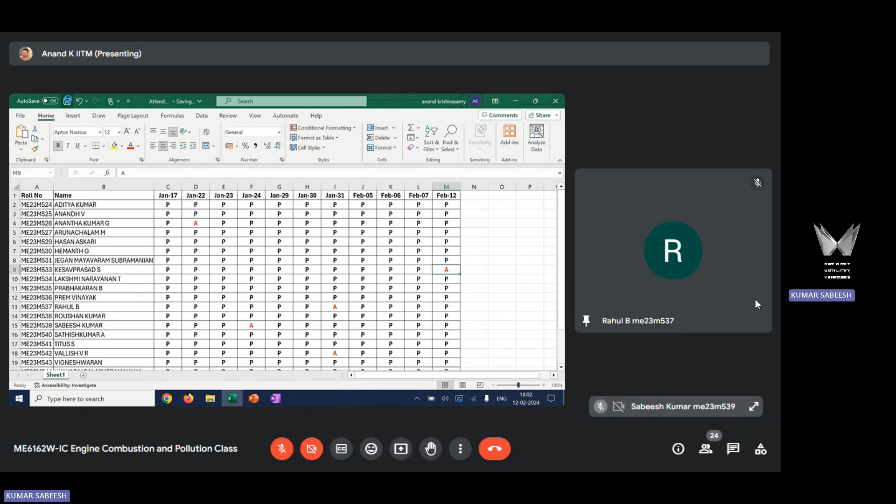Based on your request, I have discussed with the coordinator and given you the schedule for the exam and mode of conduct of exam for ME6162W. As informed, Quiz 1 and 2 will be conducted in IITM for the students here in Chennai. For outstation students, I think 3 of you, the exam will be conducted at TCS Center. The details about the mode of conduct and venue will be informed to you before the exam.

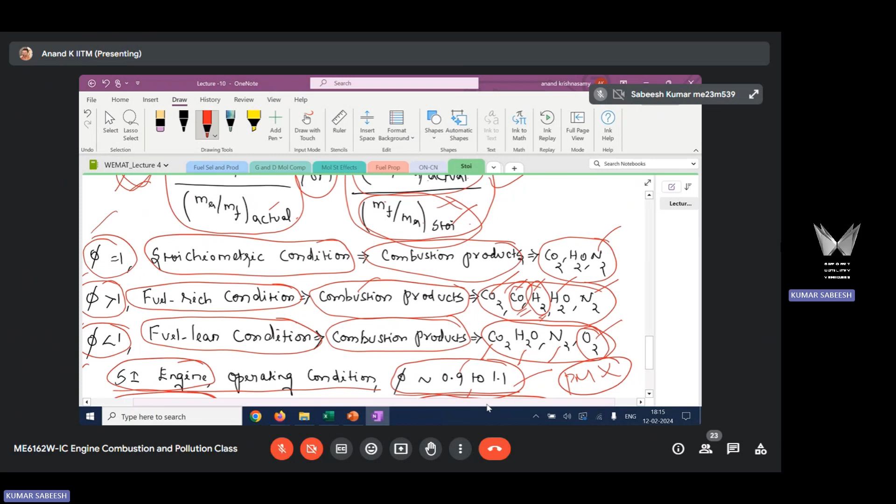If it is a fuel rich condition, the products are going to be different. You are going to have CO and H2 apart from what we have discussed. CO and H2 are the major products of incomplete combustion. Since you are using more fuel than the theoretically correct proportion, there is a deficiency of oxygen, which leads to incomplete combustion.

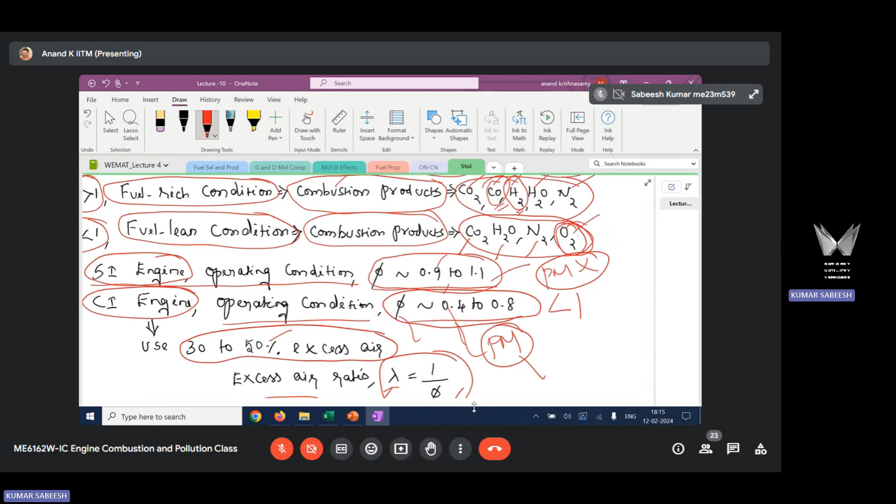The third condition is phi less than 1. When phi is less than 1, the fuel you use is less than the theoretically correct fuel proportion. This means you have a lean condition, fuel lean condition, meaning there is more oxygen available in the combustion system. Because of that, you will have that excess oxygen appearing in the product. So these are the possible phi values, and accordingly the major product composition is going to be different.

We also discussed that SI engine will have a phi range of 0.9 to 1.1, very close to stoichiometry. This is for two reasons. One, SI engine is flame propagation based combustion. To maintain a stable flame, you have to run your engine around stoichiometric condition. That is what gives a stable flame.

When the flame is not stable, the combustion is not stable, then you will have a problem of poor combustion stability and associated problems in SI engine. We want to avoid that, so we are running SI engine close to stoichiometric condition because of this reason.

The second major reason why we run SI engine under this condition is that three-way catalytic converter efficiency is high. The three-way catalytic converter is one of the after-treatment control systems predominantly used in SI engine, without which you cannot meet the current emission norms. I will discuss more about this after-treatment control system in the second module. This converter efficiency will be high only close to stoichiometric conditions. These are the reasons why we run SI engine under this condition.

CI engine, if you look at it, is always less than 1 as shown here, 0.4 to 0.8 operating range—it's always lean. This is the overall fuel air mixture, and you should note that SI engines are subject to homogeneous mixture combustion. The phi range of 0.9 to 1.1 will be the actual phi value inside the engine, whereas in CI engine, it is subjected to heterogeneous air fuel mixture.

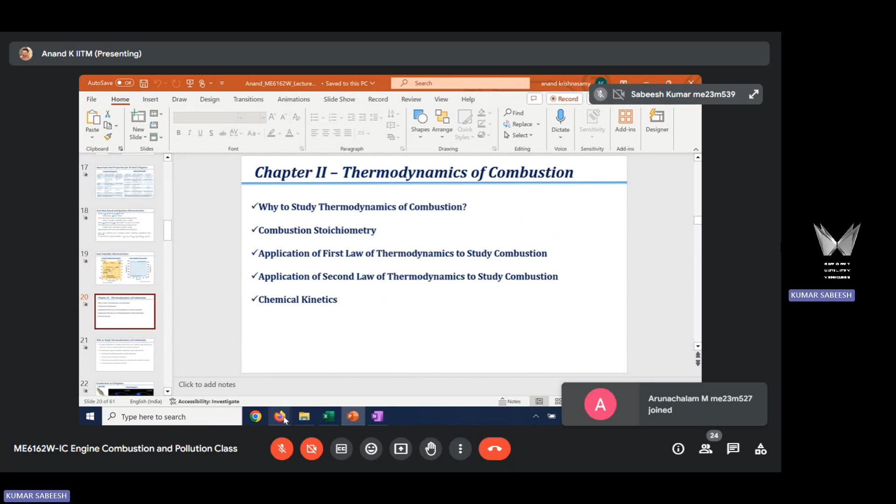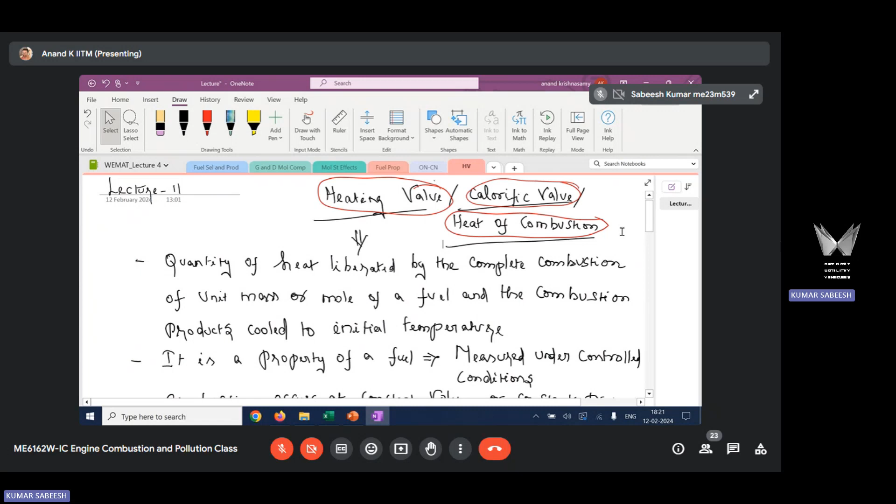Now let us see how to get these two parameters. This heating value is also referred to as calorific value in some textbooks, and also referred to as heat of combustion. All these carry similar meaning: heating value, calorific value, or heat of combustion. Different textbooks follow different nomenclature. I will follow 'heating value'.

What is this heating value? It's the quantity of thermal energy released, or quantity of heat liberated, by complete combustion of unit mass or unit mole of a fuel, where the products of combustion are cooled to initial temperature. So this gives you an estimate of how much thermal energy is released if you burn a unit mass or unit mole of a fuel. That is given by this heating value.

So here you could see that we are imposing two conditions. Condition number one: the combustion event is complete. Second one: we are cooling the combustion product to initial temperature. These two conditions are imposed when we define what this heating value is. Why do we impose these conditions?

These conditions are imposed because heating value is a property of a fuel. Any property should be measured under reproducible conditions, so you should get a similar value when you measure it multiple times. It's a measurable property of a fuel, that's why we impose this condition. Any property is measured under controlled conditions because it should be reproducible. So whoever measures it has to comply with these conditions, and under those conditions the heating value should be defined. That is the purpose here.

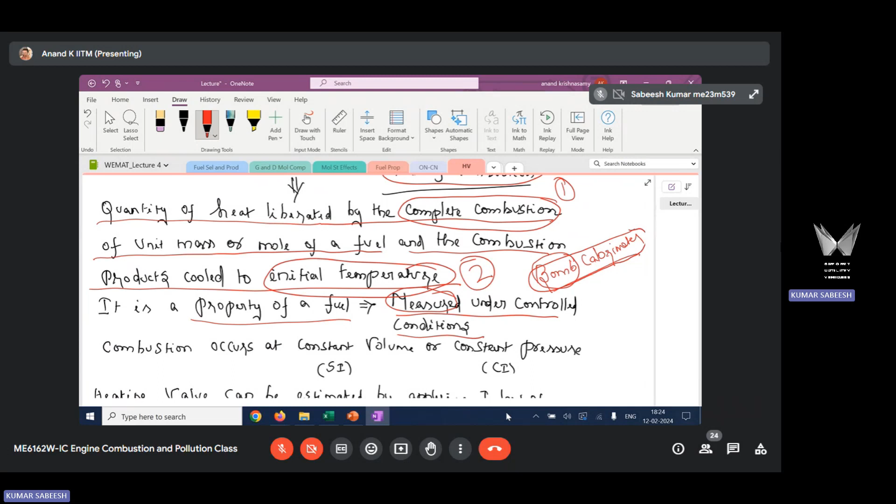Now let us see how we can estimate it by applying the first law. There are two conditions: combustion can happen at constant volume, which is how we model SI engine combustion with constant volume heat addition. The other option is combustion at constant pressure, which is how we model heat addition in a CI engine based on thermodynamic analysis. So SI combustion is approximated as constant volume and CI engine combustion is approximated as constant pressure combustion.

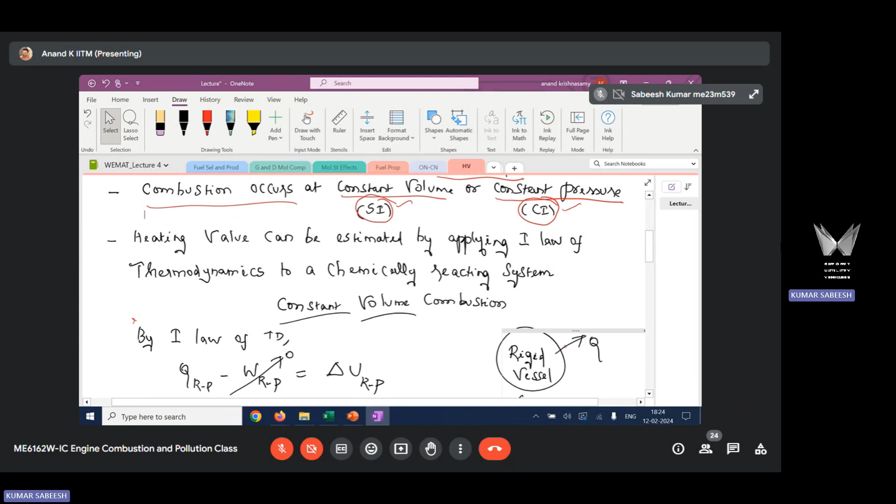Now let us see how we can get an estimate of heating value by applying first law under these two conditions. We are calculating heating value by applying first law of thermodynamics to a chemically reacting system. A system is a fixed mass of matter. A chemically reacting system has a fixed mass of fuel and air before combustion, and after combustion it will have a fixed mass of products of combustion. Now let us consider constant volume combustion, case 1.

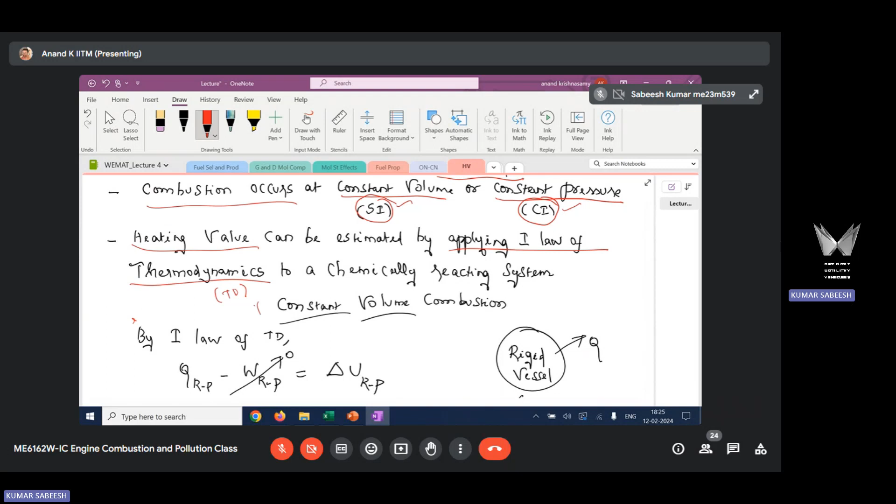Constant volume combustion you can visualize as a combustion event happening in a rigid vessel. In a rigid vessel, the volume is always going to be the same, and this fuel and air taken into the rigid vessel combust and release thermal energy. We are going to get an estimate of this thermal energy under this condition, which is constant volume combustion condition.

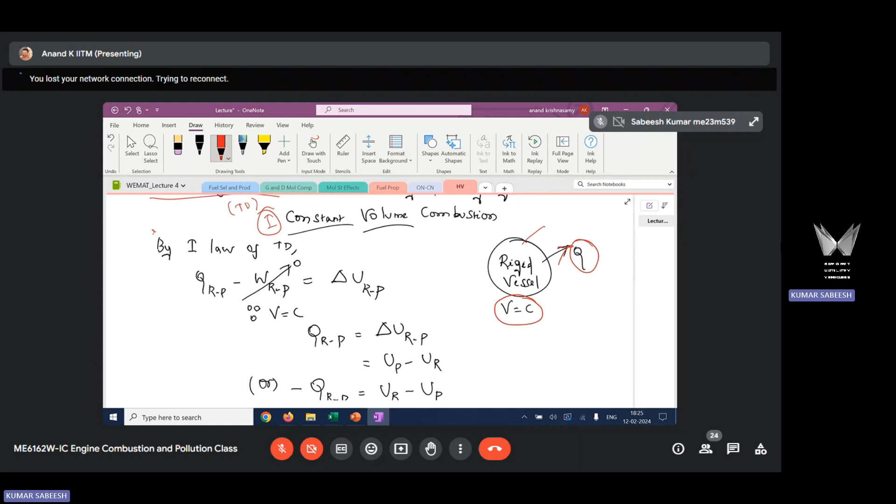So when you apply first law of thermodynamics to a system, the general form of the first law equation is Q minus W equals delta U. First law is actually a form of law of conservation of energy. We are just doing an energy balance here. Q is thermal energy and W is another form of energy.

Here I have considered a chemically reacting system. What does this R in the subscript stand for? R stands for reactants and P stands for products. Q minus W with a subscript R to P means reactants are converted to products. That is what the subscript is representing. So Q R to P minus W R to P is equal to delta U R to P by first law of thermodynamics.

Since we have considered constant volume combustion, volume is constant, so there is no displacement work here. W becomes 0. W is nothing but the integral P dV, displacement work, where dV is change in volume. In our case, in a rigid vessel, volume is constant, there is no change in volume, so W becomes 0. So Q minus W equals delta U R to P, and since W is 0, Q will equal delta U R to P.

You can write this as U P minus U R. So negative of Q R to P is U R minus U P. And what is this Q R to P? This is called heat of reaction.

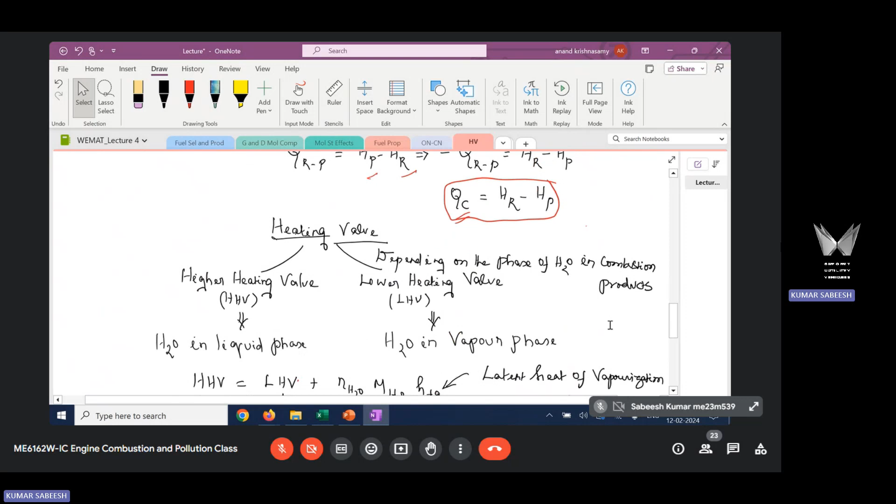Now, when you talk about heating value, there are two heating values that come into picture: higher heating value and lower heating value. This higher or lower value is based on the phase of H2O in the combustion product, whether it is liquid phase or vapor phase.

Liquid or vapor phase. So when a fuel combusts with the air, what will be the phase of H2O? Will it be liquid phase or vapor phase in the product? Vapor phase, sir, it will be in vapor phase. As a resultant of combustion, H2O will appear in the vapor phase in the product.

As such, it remains in the vapor phase. Suppose, as per the conditions we impose, if you are cooling the combustion product to the initial temperature, what will happen to that vapor? It will become a liquid.

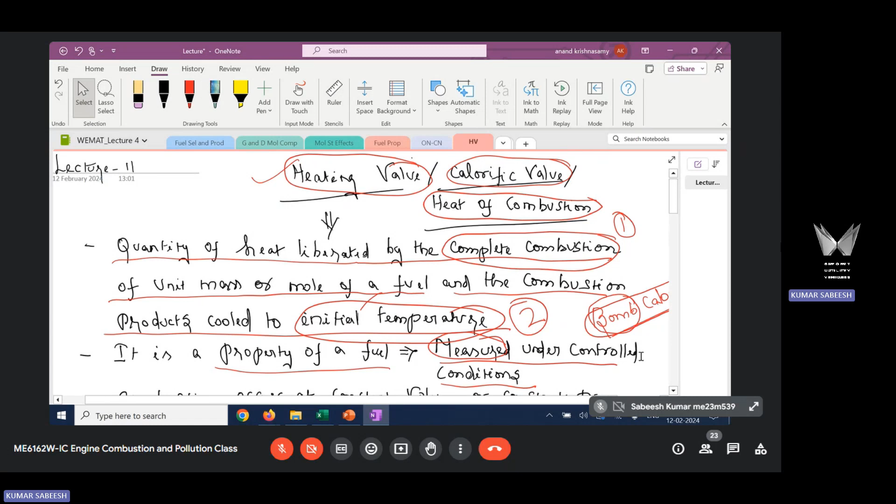Now, when a vapor becomes a liquid, how does this process happen? Conversion of vapor, condensation. So it liberates some thermal energy during this process. What is the thermal energy that is liberated? Latent heat, sir, latent heat of vaporization. Liquid to vapor conversion, there is a latent heat of vaporization. From vapor to liquid conversion, there is a liberation of latent heat. For liquid to vapor phase conversion, there is an absorption of latent heat.

The reverse thing will happen when a vapor is condensed to liquid. When you condense this vapor phase H2O to liquid phase, latent heat will be liberated. If that heat is also added to the combustion product, then you call that the higher heating value. So in higher heating value, H2O exists in the liquid phase in the product, meaning you are actually condensing H2O in the product to liquid, and during this process it liberates latent heat, and that latent heat is also added to the heating value. That is the case of higher heating value.

So its value numerically is always higher. The other case is lower heating value, wherein H2O exists in the vapor phase. So you are not condensing it to liquid phase, meaning you are not recovering any latent heat when you talk about lower heating value. That's why its magnitude is less, and you refer to it as a lower heating value.

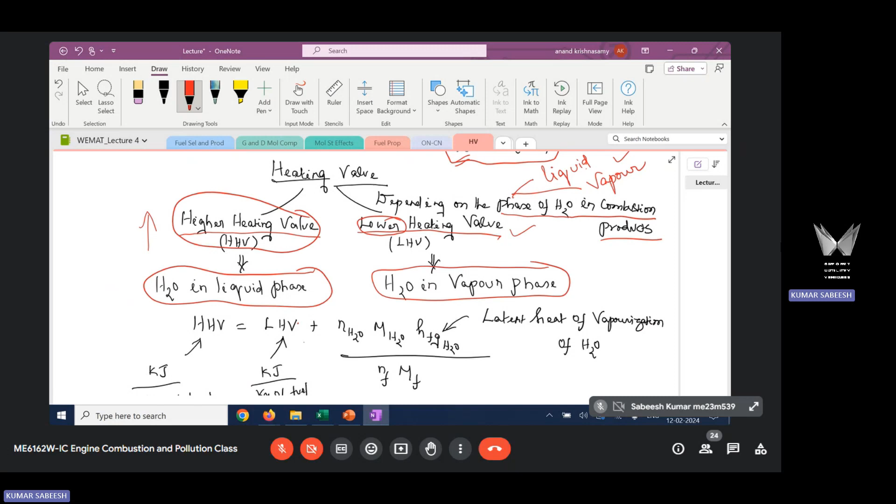So you have these two terms, higher and lower heating value, and these two terms can be connected by using this equation, whatever I have written. Higher heating value is equal to lower heating value plus the heat that you recover by condensing vapor to liquid, which is what is written here in the second term. What is this, number of moles of H2O into molar mass of H2O? What is this first term?

Capital M, molar mass of H2O. And what is the second term? HFG, latent heat of vaporization of H2O. So basically you are multiplying mass of H2O with latent heat of vaporization of H2O.

The denominator has NF multiplied by M, capital MF. What is this denominator term? Mass of fuel. So why am I dividing this with mass of fuel? Because that is how you define heating value. Heating value is defined as kilojoule per kilogram of fuel, meaning thermal energy released by burning a given kg of fuel. That is equal to lower heating value, again kilojoule per kg of fuel that is burned, thermal energy released by burning unit mass of fuel.

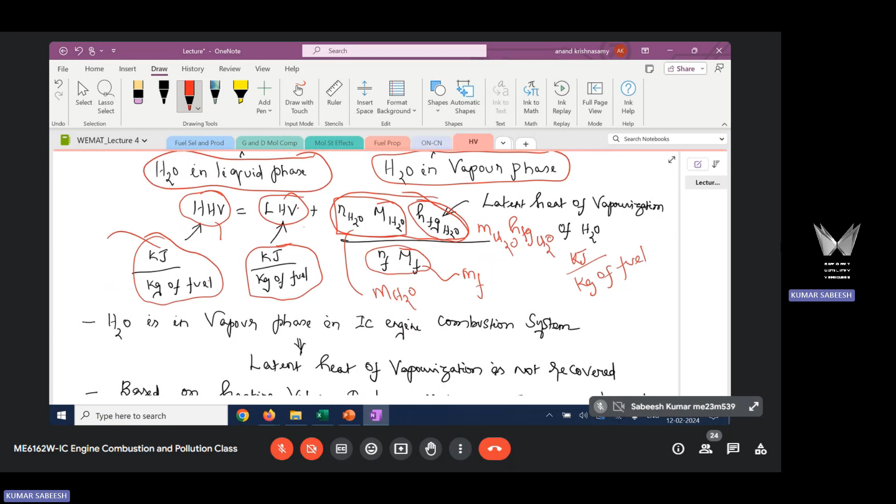Now you need to know the significance of this. Why do I have to consider this? The H2O present in the combustion product in an IC engine combustion system always remains in the vapor phase; it is not going to be in liquid phase. In an IC engine combustion system, when you combust fuel and air, H2O leaves only in the vapor phase, meaning you should always consider lower heating value, not higher heating value, because you are not condensing H2O to liquid phase.

But when you do the measurement with the bomb calorimeter, as I said, this is a measurable property. When you measure it, what you are measuring is only higher heating value, not lower heating value.

Once you take fuel and air in a bomb and allow it to combust, the thermal energy released by combusting fuel and air in the bomb is absorbed by water. So basically you are cooling the combustion product to the initial temperature when you do the measurement. Because of that, H2O present in the product gets condensed to liquid phase, and that heat is also added when you talk about thermal energy release. So along with the actual thermal energy release, you are adding the heat due to condensation of H2O to liquid phase. So what you measure in the equipment is always the higher heating value.

But what is relevant for an IC engine system is the lower heating value. That is why you need to know how to convert the higher heating value that you measure into lower heating value.

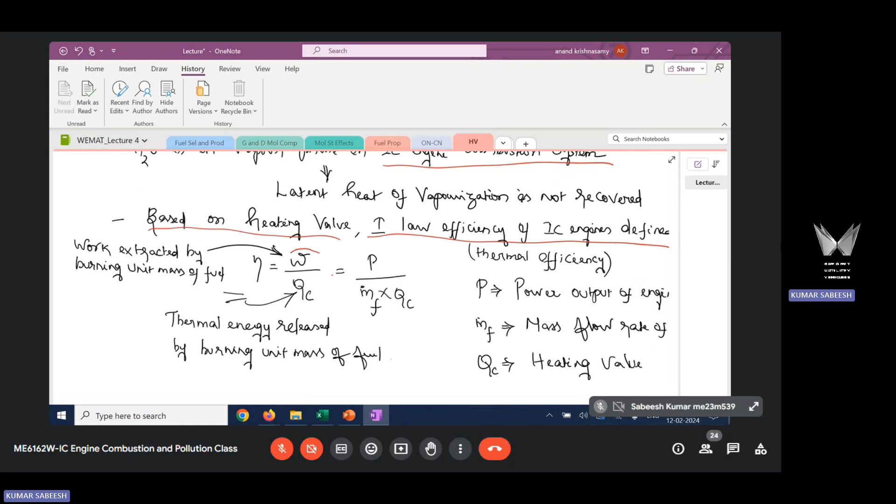Thermal efficiency of internal combustion engines is defined by this equation. As you know, thermal efficiency is equal to work that is extracted by burning unit mass of fuel with respect to thermal energy that is released by burning unit mass of fuel. Thermal energy released by burning unit mass of fuel is nothing but heating value. So in an energy conversion device, which is the IC engine, you are converting that thermal energy into work.

Basically, in the first law efficiency equation, you are relating output by input. What is the output? Work that you extract. What is the input to get that work? Thermal energy from the fuel. So you relate this to get the first law efficiency of IC engine, which is what I have written here. This is also called the thermal efficiency equation that you use, which is one of the important parameters when you analyze an IC engine. This is one of the important engine performance indicators, thermal efficiency.

This work is not measured in an engine. What is measurable from an engine is power, right? So you can express this equation in terms of power. Efficiency is equal to power. How did I get this power? Power is obtained by multiplying mass flow rate with W, the numerator term. The denominator is also multiplied with mass flow rate. That is what you are seeing, the second form of the efficiency equation, which we frequently use when you calculate thermal efficiency.

This power can be indicated power or brake power, as you know. It is based on what context you analyze engine performance. It can be brake power based or indicated power based. So this power is measurable. Brake power, you use a dynamometer to measure. It's a measurable parameter. That's why, since work is not directly measurable, you always use this equation to calculate thermal efficiency in terms of measurable parameters. How does it originate? It originates from this parameter, heating value. So this is one of the important parameters which helps us find an important performance metric, thermal efficiency.

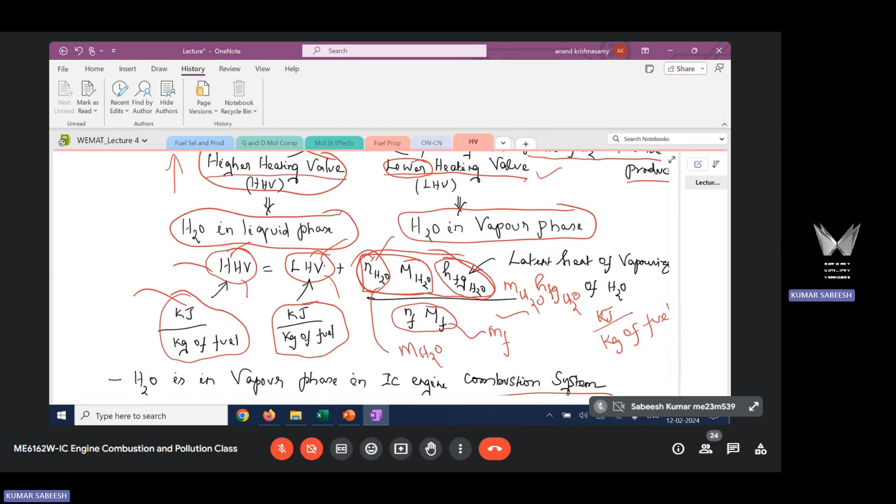So to convert higher heating value to lower heating value, you have to use this simple equation. What you need to know is only the number of moles of H2O. Once you know the fuel's molecular formula, you will be able to get the number of moles of H2O. The rest of the parameters are known to you. So from this, you will have an estimate of lower heating value from the measured higher heating value, and that will help you find the thermal efficiency more precisely.

One question, sir: W upon QC, you've written like P divided by MF into QC, right sir? Yes. So W is equal to P into T, power into time, right sir? W is specific work.

Acha, so it's work per unit mass of the fuel, right sir? Always, because the QC term is defined per unit mass. Okay, that's why the mf has come. You need to have consistent parameters when you divide one by other. Got it sir. So that's the reason mf has come in the denominator.

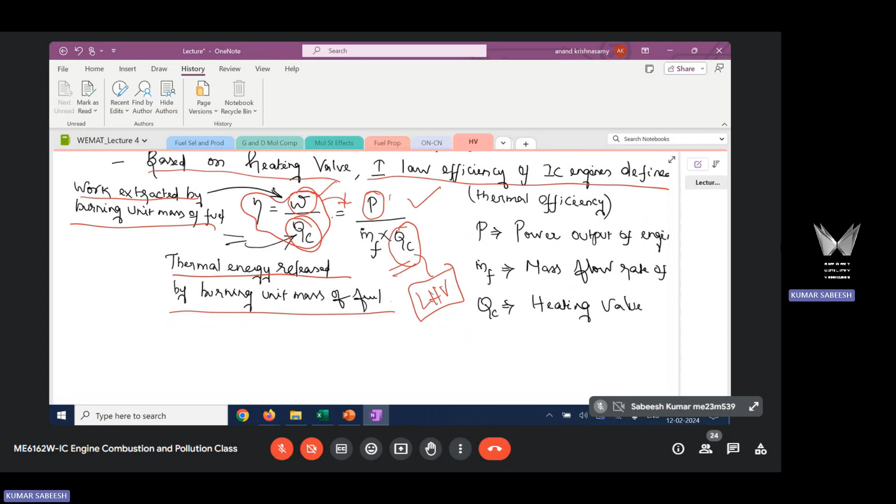Yes, exactly. To get power, you are multiplying by m dot. So numerator and denominator in the first equation are kilojoule per kg. The second equation, you multiply that by kg per second. So once you multiply by kg per second, what do you get? Kilojoule per second, that is power. Denominator kilojoule per kg, kg per second is m dot f, and QC is again kilojoule per kg. Perfect, okay sir, thank you so much.

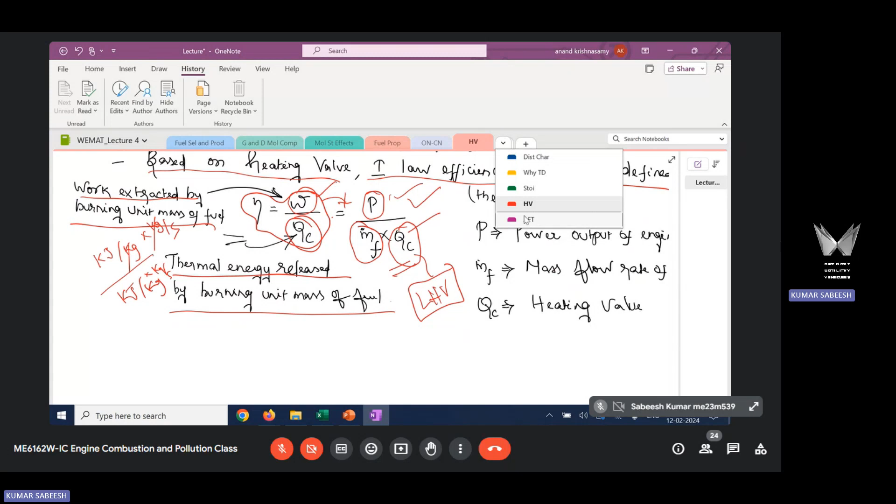So I said we are going to get two parameters by applying first law. One is this heating value. Using the heating value, we have discussed how we can get an estimate of first law efficiency, which is one of the important parameters when we do IC engine analysis to gauge its performance. So it's a performance metric, you say. It's an important performance metric, thermal efficiency, that we can obtain from heating value.

And the important point for you from this analysis is you should use lower heating value when you do the thermal efficiency estimate. That will provide a more accurate estimate, not higher heating value, which is what you are measuring. And you can also estimate heating value by using the first law equation, as I have just shown.

The next useful parameter you can get from the first law equation is adiabatic flame temperature, which is the maximum temperature reached by the combustion products due to the combustion event. So we need to have an estimate of what will be the maximum temperature reached by the product. This is one of the important design parameters. When you design an IC engine, you have to carefully design it in such a way that the engine is durable. We know IC engines are durable.

Typical lifetime is 10 plus years, right? It's durable. To make it more durable, you have to carefully choose the material, carefully design the material and design the engine, because it is subjected to high thermal stress due to high temperatures and also temperature variation. Temperature variation poses thermal stresses, and the material and design have to account for that. One of the useful or fundamental parameters you need to fix the material or design an engine is how much is the maximum temperature reached by the products of combustion.

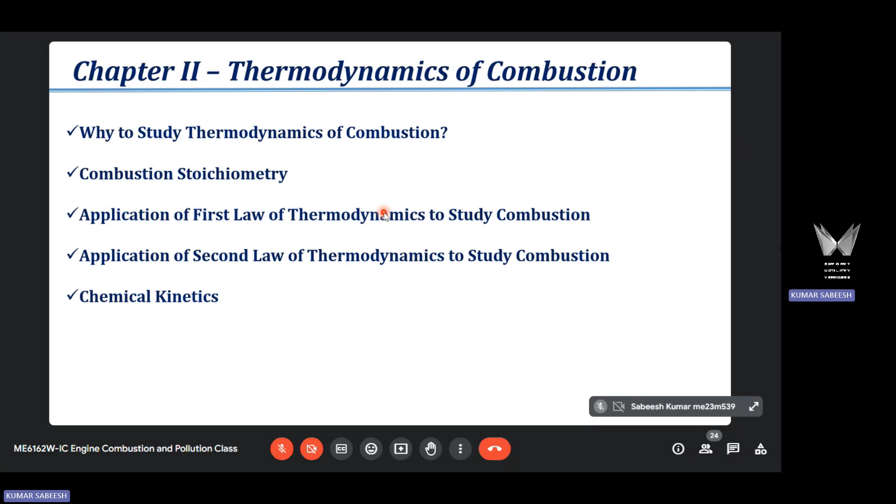This maximum temperature reached by the products of combustion is called adiabatic flame temperature. This you can get by applying first law. This is one of the useful parameters you can get by applying the first law of thermodynamics. Now we are going to see how we can get an estimate of this parameter, adiabatic flame temperature.

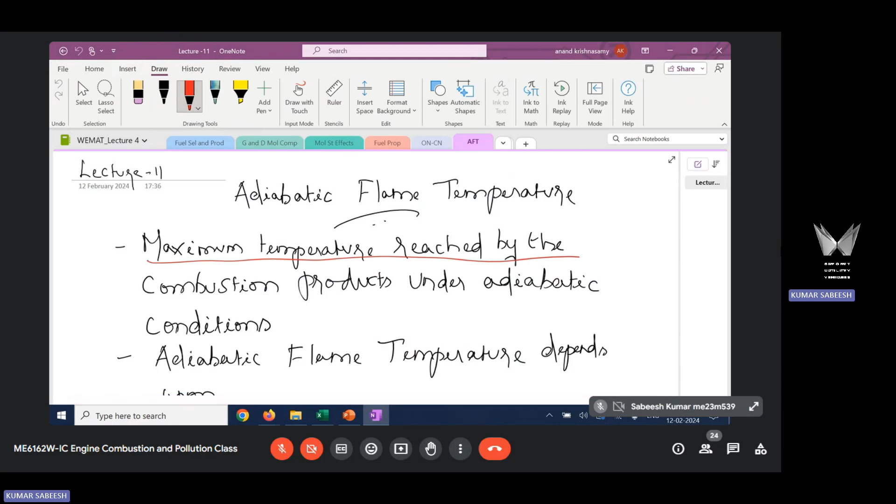As I said, this is the maximum temperature reached by the combustion products under adiabatic condition. The name itself implies it's an adiabatic flame temperature. What is adiabatic condition? Q supply is zero, sir. So Q supply is zero, there is no heat interaction. There is no heat interaction between the system and the surrounding, that is what is adiabatic.

So you can assume a situation where the engine body is thermally insulated, completely or perfectly insulated, so there is no heat interaction. This is an assumption. Why do we make such an assumption, and why do we get such an estimate? This is because we always do design with a factor of safety. So we are talking about the maximum theoretical temperature. You need to have an estimate of theoretical maximum temperature. The actual value will be lower than this, but we need an estimate of theoretical maximum temperature to design the engine, since we always design it with a factor of safety.

That's why we are discussing a hypothetical or theoretical situation encountered by the engine where it is perfectly insulated, with no heat interaction between the engine system and the surrounding - I mean the working fluid within the engine and the surrounding. That is the adiabatic condition. Now, under this adiabatic condition, if fuel and air, which is a chemically reacting system, undergo combustion, how much will be the maximum temperature reached by the products of combustion? That temperature is this temperature.

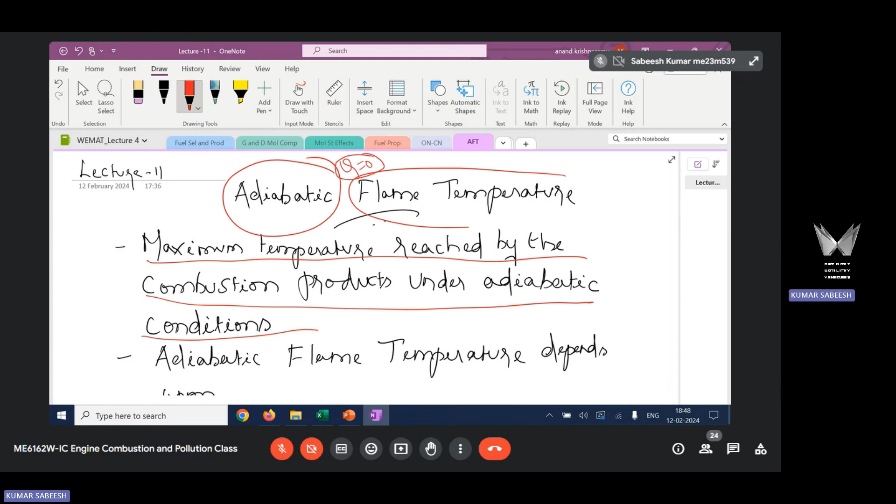So when I talk about adiabatic flame temperature, there are several variables that influence its magnitude. Our focus is to get an estimate of this value by applying the first law of thermodynamics. So before I talk about the temperature value, I need to know what are the variables that can influence this value.

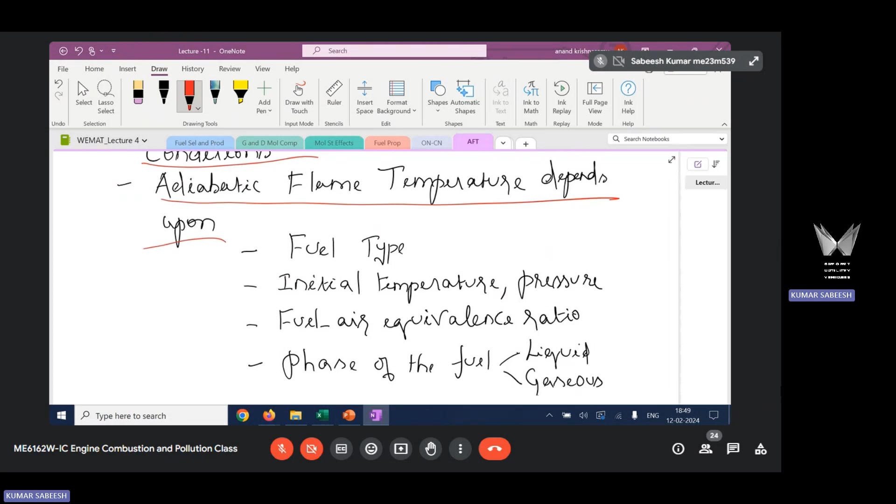So these are the variables. One is what kind of fuel I use, which is going to affect the maximum value of temperature reached during the combustion event. Can anyone tell me how the fuel type affects the maximum temperature value of the product? If it has less energy density value...

Here you should note that octane or cetane number is only to analyze ignition. Here we are talking about the product temperature value. So, sir, it depends on energy density of the fuel, the calorific heating value we just discussed. So it is going to be different based on fuel.

So you are talking about converting reactants to product, and what is the maximum flame temperature reached by the product - this is adiabatic flame temperature. It's a strong function of fuel, because the product temperature or thermal energy release is a strong function of what fuel you are combusting. Different fuels will have different enthalpy of formation.

It basically depends on the compounds in a multi-component mixture - we are talking here gasoline and diesel. Based on the composition of this multi-component mixture, the thermal energy released is going to be different, and accordingly the adiabatic flame temperature reached is going to be different. So fuel is one of the important variables that affects the maximum temperature reached during the combustion event.

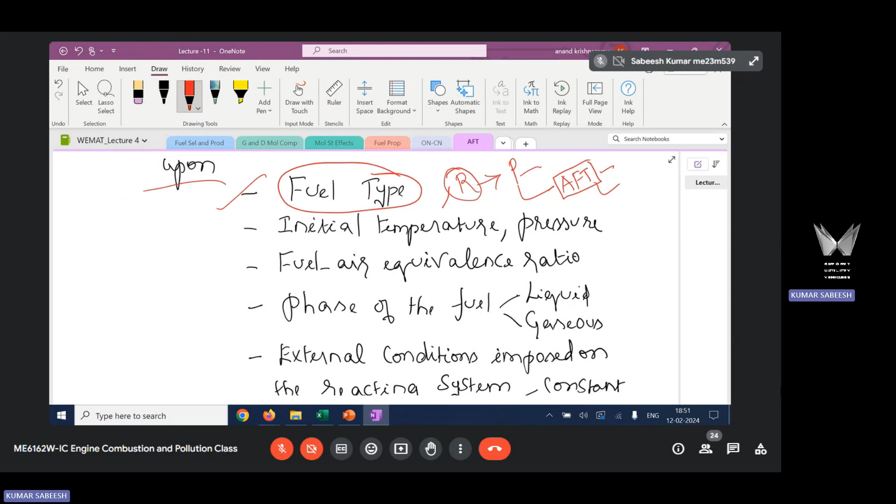Sir, analysis of this heating value and calorific value - whenever we talk in terms of amount of energy released, we will be talking in terms of weight of the fuel, right sir? Weight of the fuel? Rather than weight, you should say mass of the fuel. Yeah, mass of the fuel. Am I right, sir? Yes, correct. Okay, thank you, sir.

Thank you. Yeah, correct. In fact, heating value is defined in terms of how much thermal energy is released by burning unit mass or unit volume of fuel, unit mole of fuel. Understood, sir. Suppose if you have a gaseous fuel, the volume basis will carry significance. Liquid fuel, generally we go with mass basis. Understood, sir. Fine, thank you.

Sir, one clarification required - quiz 1 will be from chapter 1, right? Quiz 1, whatever contents we discuss until the quiz. Quiz 1 is on March 2nd, right? So whatever content we discuss until that Wednesday of the week. Okay, sir, that will be considered as the syllabus. Basically, the purpose of conducting the quiz is to get you familiarized with the contents discussed until that point of time. Sure, sir, okay, thank you, sir.